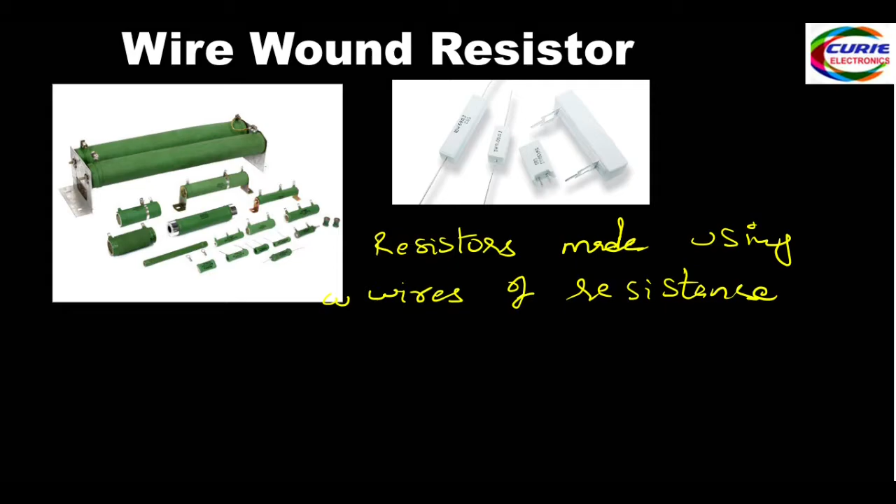Resistors made using wires of resistance material are known as wire wound resistors.

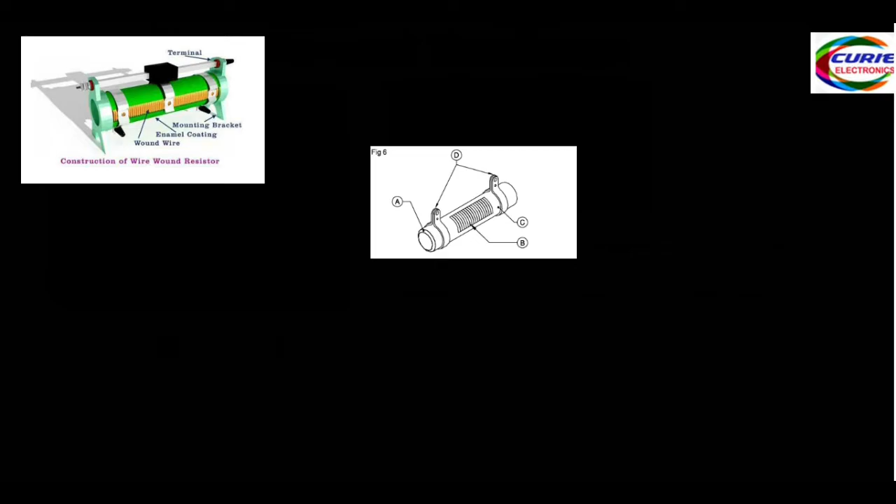So this is the construction of a wire wound resistor. How is it constructed? On a former, wires are wound. This former is usually a porcelain former. On top of the porcelain, these are the wires wound on it.

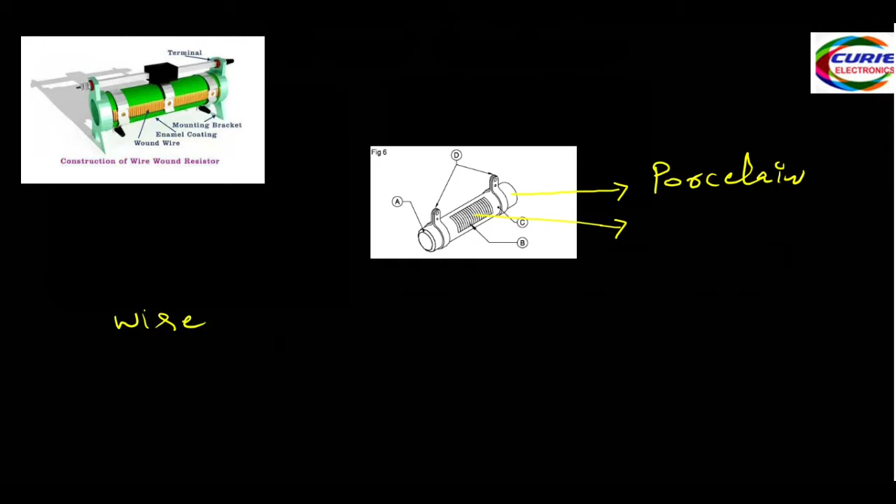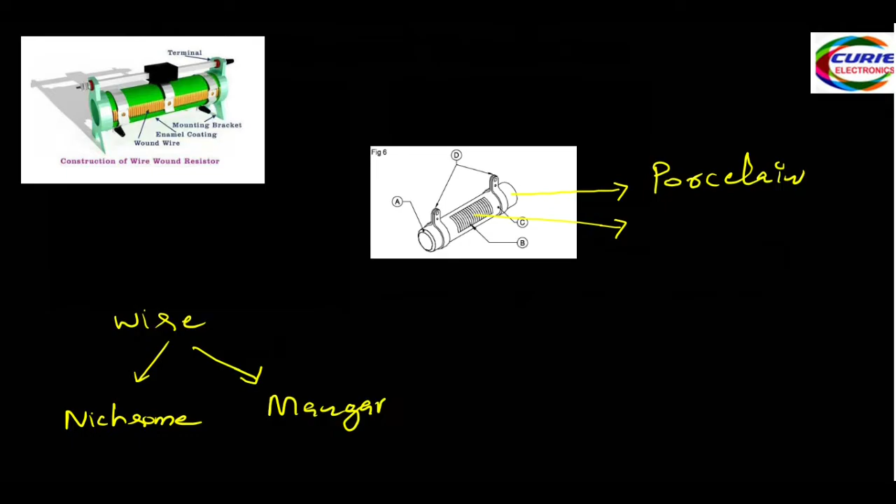Resistance material wire. Usually there are two types of material used for these wires. One is nichrome. The other one is manganin. It's also known as Eureka. So these are the two materials used for the wire.

That's the wire. Then this wire, both ends are connected to these terminals. These are the terminals from where we'll get the external connection.

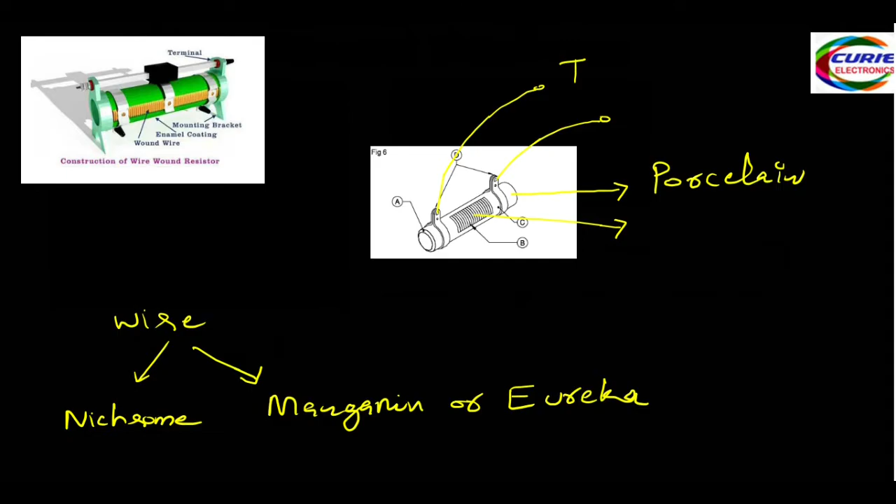Now if you see here, this is a clearer diagram. This is a rheostat actually. Using the center contact, if you move it, you can get different values. Here you see one green color coating. After winding wires on the porcelain former, they will insulate this area. One insulating material is used to insulate these wires after winding.

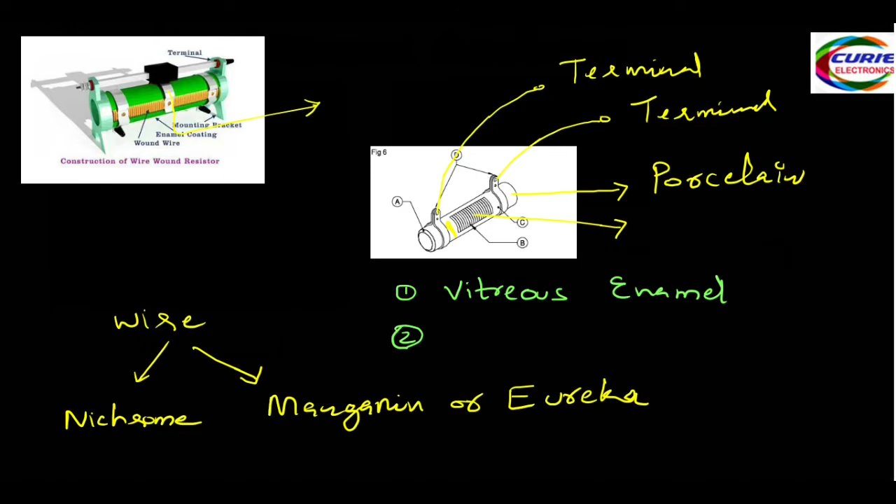What is the insulating material they use? They use mainly vitreous enamel. They can also use ceramic paste. This is also known as shellac. So these are the two insulating materials applied on wire wound resistors, so that the heat will easily dissipate, as well as it is protected from atmospheric corrosion and all.

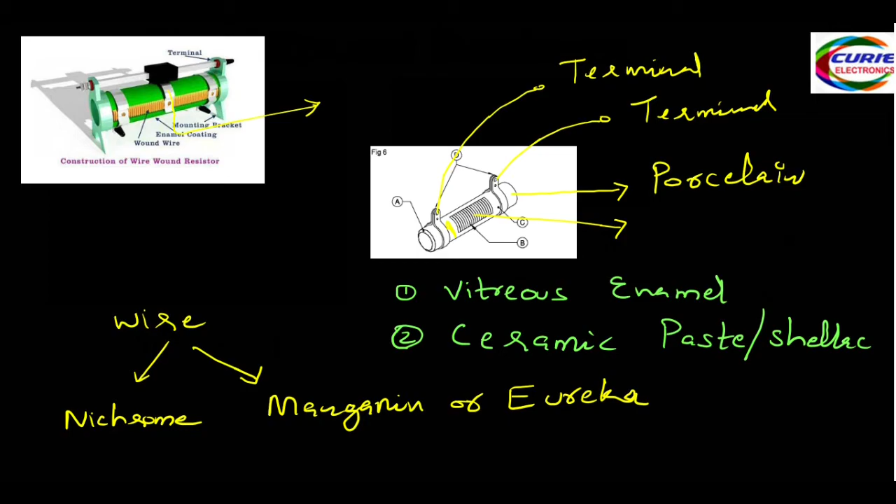So this is what the construction is all about. It's a very simple construction. This is how these wire wound resistors are made. The main thing is the wire material. That is manganin and nichrome. These are the two materials. Manganin is also known as Eureka.

Now simply, if you ask why we need these resistors, we already have carbon resistors. But these wire wound resistors can be made in a low value range. If you want very low value resistors, we can make them using wire wound resistors, that is 0.1 ohm. In this range we can make it.

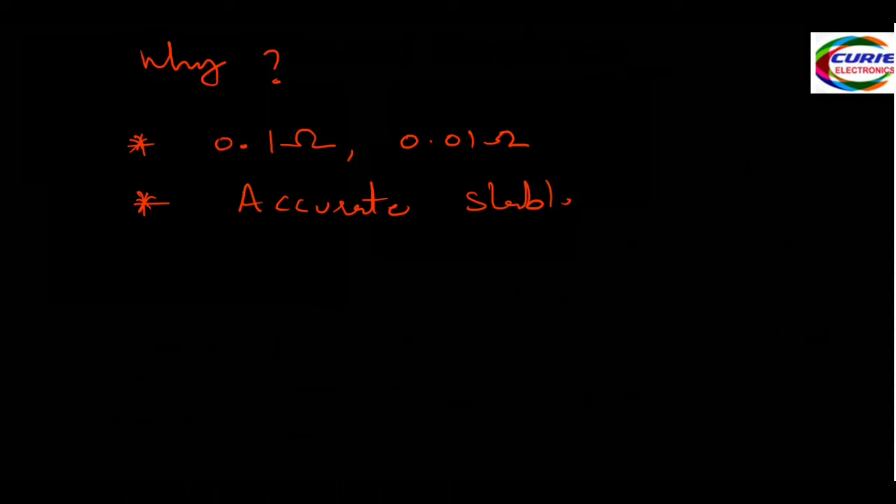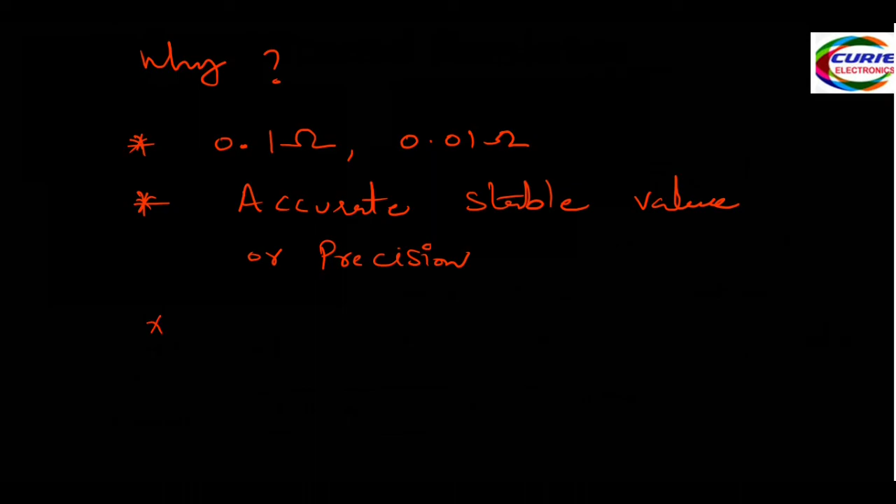And one more important thing is that we will get an accurate and stable value, or precision. Precision is more for these wire wound resistors. Also, there is something called power rating or wattage rating.

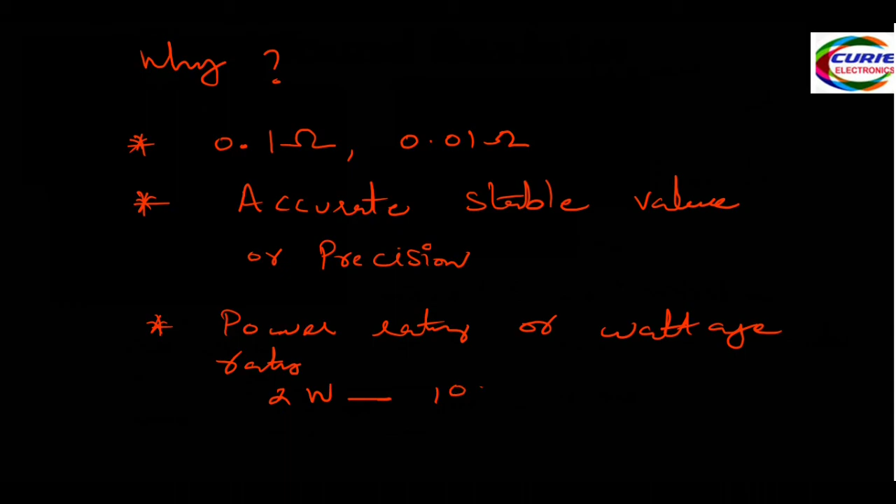For wire wound resistors, it starts from 2 watts and can go up to thousands of watts. So whenever we need to check a high power load, these wire wound resistors or rheostats are used as loads for checking power supplies, like UPS, inverter, all those applications. So it was a quick short video.